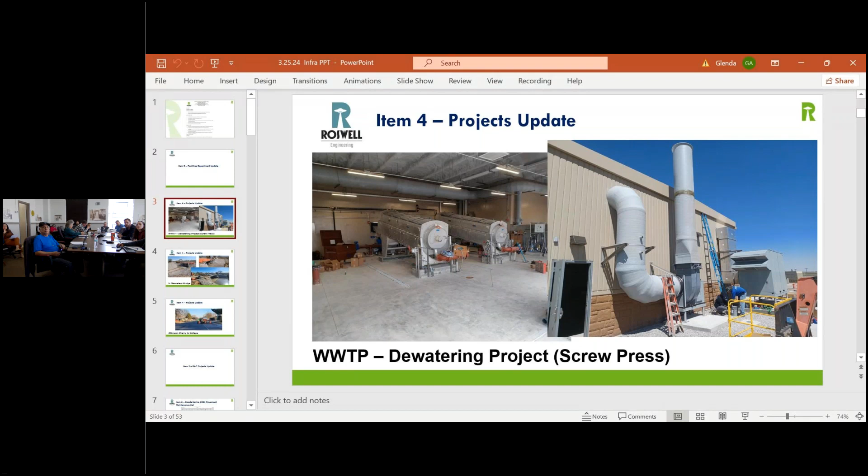Any specific projects that you want an update on? I think for a large part of it, a lot of it is self-explanatory. We have a few pictures from the dewatering project, and then the next slide is some pictures from the Mescalero Bridge project. But as the Chairman said, we'll stand for any questions on the engineering project update.

On the bridge, when is that going to be done? Thomas McAllister: We've got about 2 weeks of roadway before we complete the roadway and structure construction. But there's a lead time on the actual bridge railing, so right now we're trying to figure out how long that lead time is and if we can put anything in there temporary. We may be able to come in with some temporary wall barrier to protect it and open the road until we can get the guardrail installed. As far as the project construction roadway structure goes, we should be able to have it completed within the next 2 to 3 weeks.

And if it gets as big as that river can flow, do you have to have a guardrail? I don't know out here, I just know how big it was coming across Main Street. Yes, sir, due to MUTCD standards, we have to install guardrail to open it to traffic, or some kind of temporary railing system. Because if it gets as wild as it did on Main Street, it'd be better if it could fold over, because you don't want it to catch trees, it'll take out the whole structure. Right, this structure is considerably bigger than what was there, probably 5 times bigger.

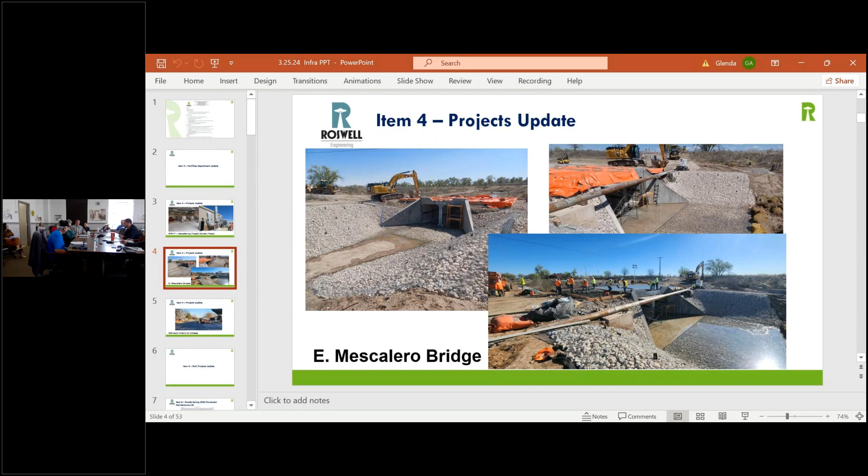I'll give you an update on some of our projects we've had on the list for some time. First is the apron replacement project, 1920 grant. We received a 1 year extension from the FAA, so it won't expire until August of 2025. That will be a fiscal year 25 project.

The next item is basically the same type of project on the ramp, but we won't be doing that until like 2027. So next fiscal year I'll ask them to extend that one year out, unless of course we have funds to complete it.

For the airport master plan, we received the second working paper. The TAC team received that on February 29th. I asked that they have all their comments back to me by last Saturday, and I received one comment back from those on the TAC team. So we'll proceed with working paper 2 unless we receive others, and we can take those comments into consideration.

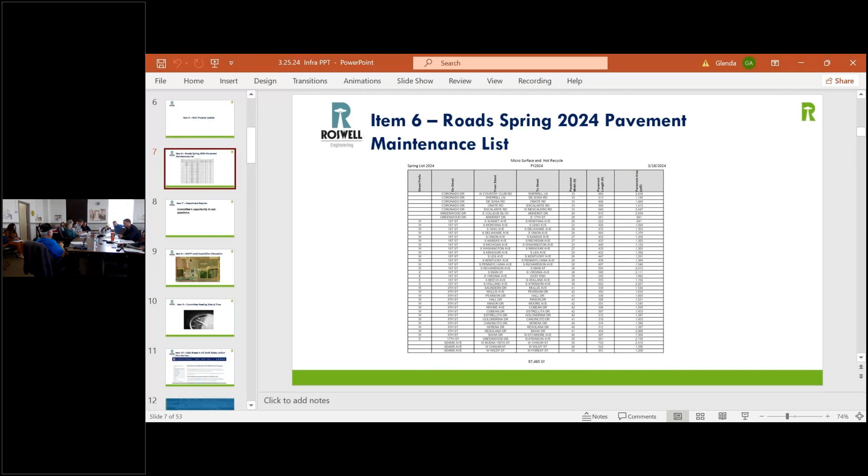Next item. Informational reports from departments associated with infrastructure committee, and understanding that we have additional departments coming on board because of general services. So it's not just the departments that used to report to infrastructure. Now we have like parks, I believe, and I don't know what other departments.

So my opinion is if department heads took the time to put a report together and they want to give a report, then we can hear the report. For the most part, I take the time to look at the reports before coming to the meeting, and if I have specific questions, I'll jot them down to ask instead of letting the department heads take time and go over their reports.

But that doesn't mean we will not hear your report if you do want to give it. Committee members, if you want to hear a specific report, you can request to hear that report. If not, we'll just ask the department heads if they would like to give their report, or just skip over it.

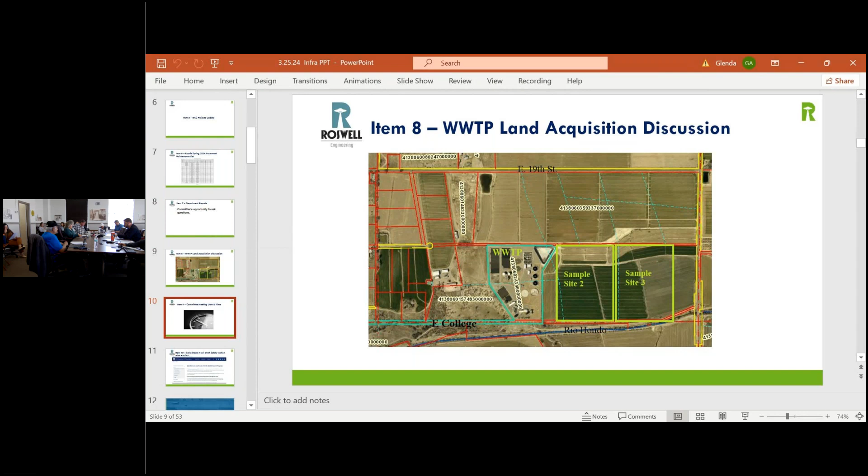The reason this one is in here is I requested for this particular item to be placed as an action item, and I had met with Councilor Korn.

During the discussion, we talked about a lot of the items from Infrastructure Committee being directed into finance or legal. Councilor Korn said he would like additional time if some items are coming to finance, to be able to get to know the item and be aware and research it.

So I told Councilor Korn that I would request for the meeting to be held on the third Monday of the month instead of the fourth, which would give Finance Committee an additional week in case we send a few items to Finance, so they can look at it and research it.

Committee members, do you have any comments? Any concerns of moving the meeting to the third Monday, which will be right after the city council meeting?

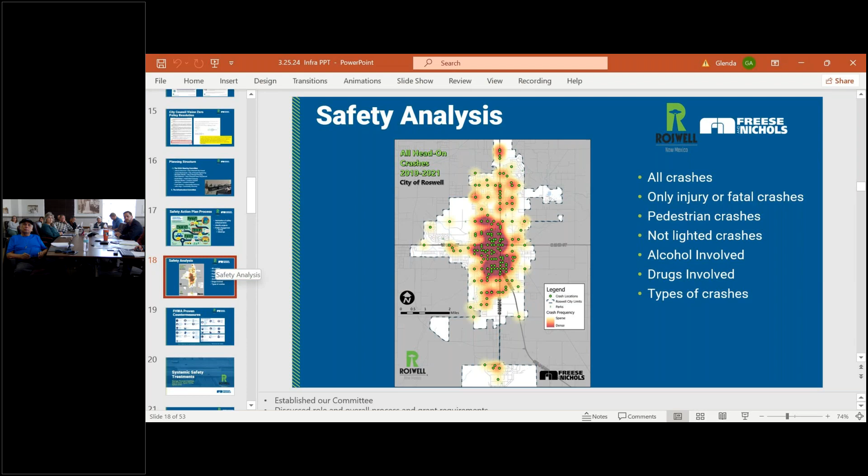Next - the Federal Highway Administration has a set of proven countermeasures where they've done years and years of analysis on what works where. And they've given us guidance to look at, I think there's 21 or so different proven safety measures where they've cataloged - if you do this, this will have a certain percent reduction in crashes based on your conditions. So if you've got a lot of

dark crashes, just putting a light out there at the intersection, improving the visibility, has a certain reduction factor. And so you can multiply the crashes by the volumes and come up with a reduction factor and figure, well, if I spend $5,000 on putting this light on, I'll get $20,000 worth of benefits. So you run those calculations and see where the low-hanging fruit is, what I can put in there for a certain amount of money. And it's a variety of things.

Look at the signals. We have backplates to prevent the sun, so you can see the light a little bit, but if you have a yellow reflective edge around it, that makes that head more visible. That has a certain percentage benefit. So all these small things that are not very costly can have great benefits.

And so we are looking at the program of those improvements as a system-wide improvement set, and then some very focused projects to look at doing things. So next slide, a little bit about our systemic safety.

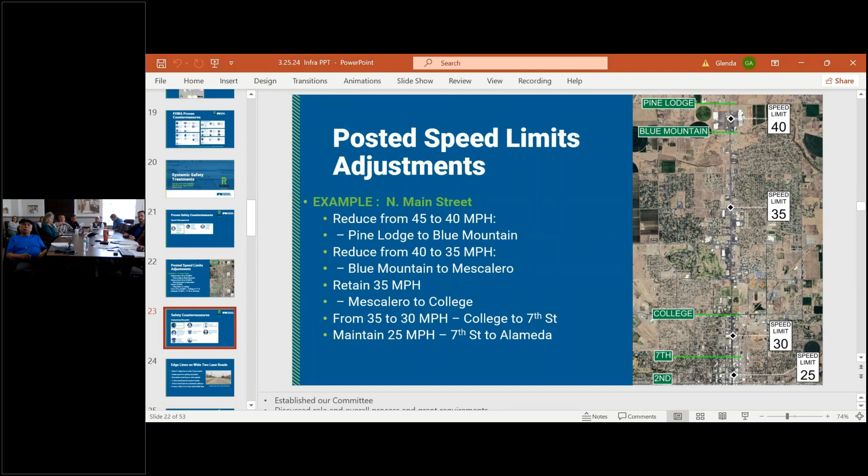Pedestrian and bike considerations for some of these cases. Bike lanes—we have a bike plan that suggests we do bike facilities on areas of the streets where we also have some wide two-lane streets. If you have a wide two-lane street, you have a lot more energy driving than if you put an edge line in there. Say I've got an 11-foot lane, leave 5 or 6 feet on the outside—all of a sudden I've got a constrained traffic calming device for the drivers, and I've got a de facto bike lane. The bike lanes can sometimes be used by parkers too, depending on what's needed in that area.

But if you've got something wider, you can put in a buffered bike lane. Think of some areas around schools that have a very wide area—we could have a buffered bike lane where kids might be riding their bikes to school, things like that.

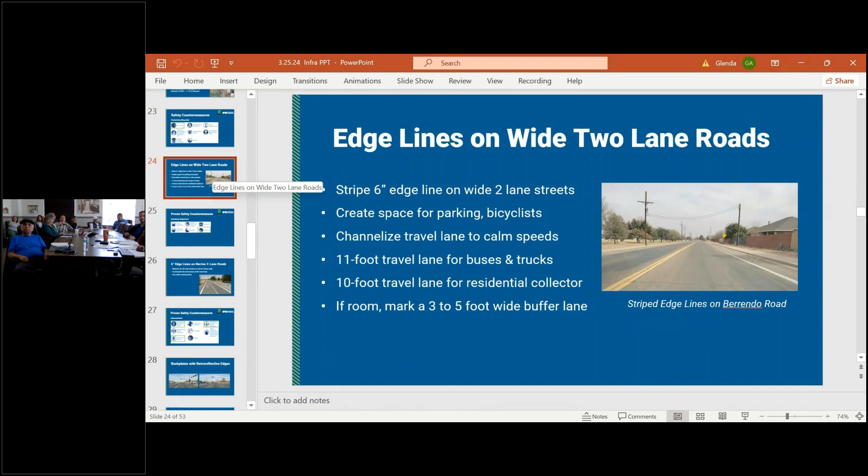Next is a little bit about our edge line striping. There are several treatments, but with edge line striping, sometimes instead of a 4-inch wide line we put in a 6-inch wide edge line to really strengthen that edge, especially if you're going to run off the road if you don't pay attention to that edge line.

So going in with that in a rural type setting has a calming effect, knowing where that edge is. I can see visibly that I have a narrow lane to work with, and it tends to keep that traffic from going quite so fast. And again, you denote the edge where you're going to lose control if you go down that point.

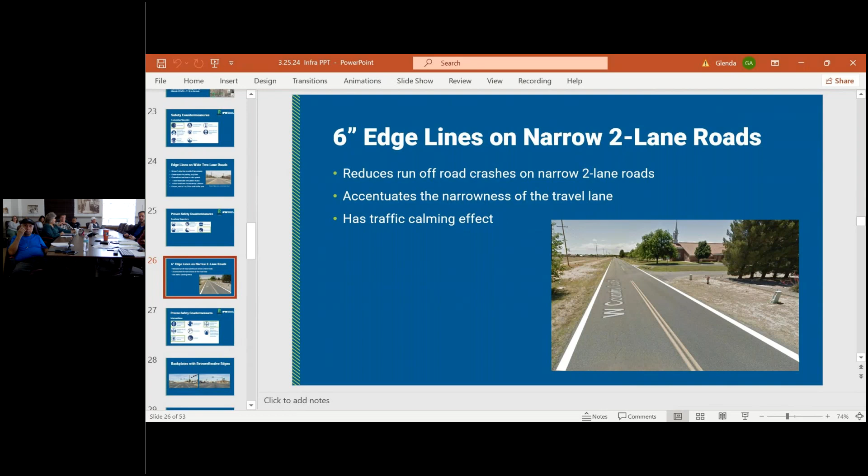We talked a little about yellow change and all red intervals. There's a certain area you don't want to go too long on those yellows or too long on red because people start expecting to have a long term and they blatantly don't stop at a yellow when they could have. So you don't want to make them too long. So there's a reasonable range that we comply with. And all of this stuff is in the manual on uniform traffic control devices of how to do it, how to comply, how to apply these things.

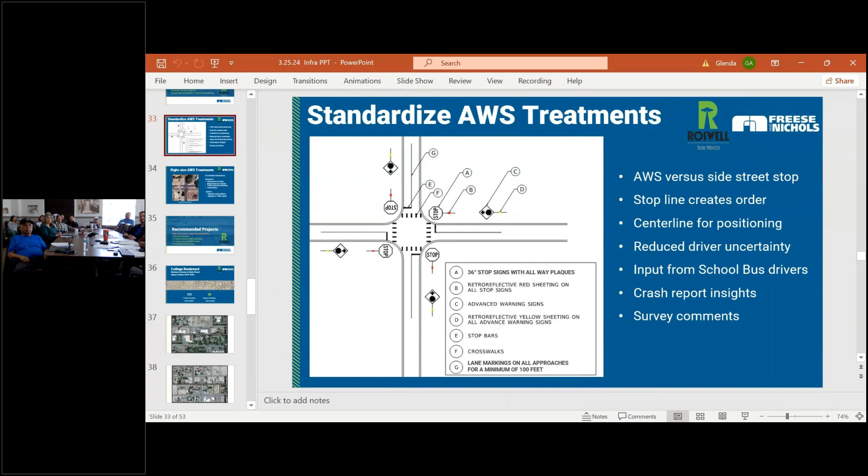And then, okay, so that's the standardization of all-way stops. Next slide. We'll try to go fast so we don't spend too long now, so you have plenty of time for questions.

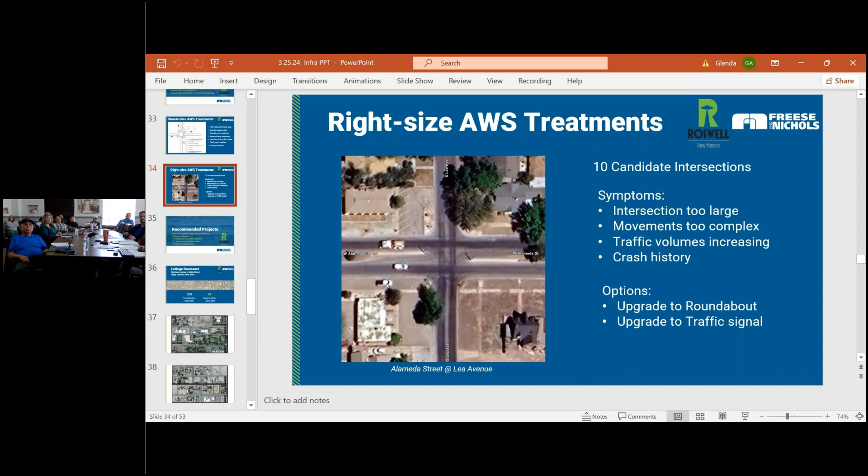Right size in the all-way stop treatments. We do have, this is Alameda, but big wide intersections, so it's hard to judge when you've stopped at your stop bar and this other guy's way over there. Who stops first and who's going to go, and one has a long distance to go through on that control, rather exposed going through large intersections. So maybe a candidate for a traffic signal, maybe an opportunity for a roundabout to kind of better control and manage that setting where everything comes into play.

Some very specific recommended projects. Now, even we're gonna plan to do all these systematic projects. They're all in play, and we're in our implementation project that we will propose to federal administration for the Safe Streets for All implementation grant. It would be all of those systematic elements. Upgrade the all-way stops, put in backplates, put in the signal sign, put in the edge line striping. That's kind of a baseline of those things.

But then we want to look at some very special projects that looked at those high injury network elements, high injury intersections. 3 special projects. We have College Boulevard from Main to Montana that just jumped off the page. There's a ton of crashes in a very short distance along this section. The next one was South Main at McGaffey Street, a very concentrated focal area of dozens of crashes all within a couple of block sections.

So I love the focal area. And then 3rd Street and Main Street is kind of a special case, but it works functionally with the issue of congestion at 2nd and Main, and it's queuing up 4th Street and all the stuff. So we have a concept for that. I'd like to walk you through those real quickly, and then we can open up for some questions at the end.

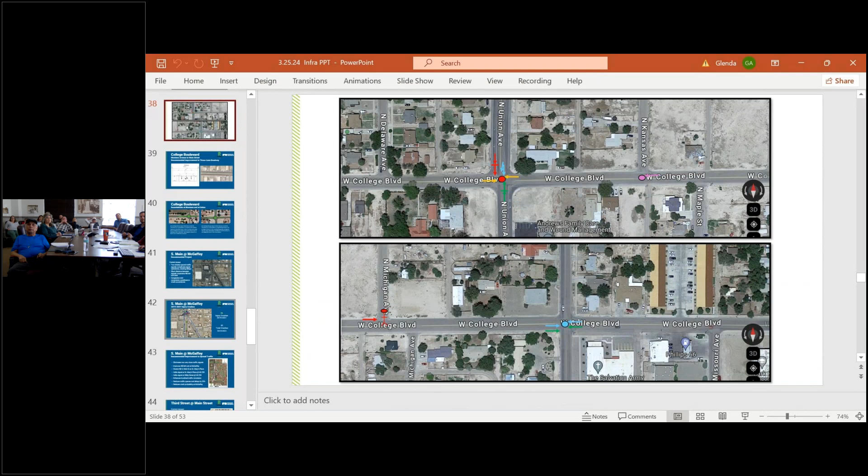Next one down, that's just a focus area. We have Union, around that's all-way stop concentration crashes. But even just throughout, there's just a host of small crashes on this core of driveways and things like that could benefit from having a center turn lane. They can make it a 3-lane that starts at Main, making that 3-lane consistent all the way through to where we connect down to the 4-lane that's over at Montana. So that's the concept for this project.

The next slide is it's going to get a standard 3-lane street with a center turn lane up and down. Then we have something we can do when we get to the intersections. We have dedicated lefts and things going on, some kind of storage area for people who want to turn left into driveways. And then we would supplement that with a 10-foot shared use path along one side that would bring the bike lanes on into this corridor, then a shared use path to get over to Main Street.

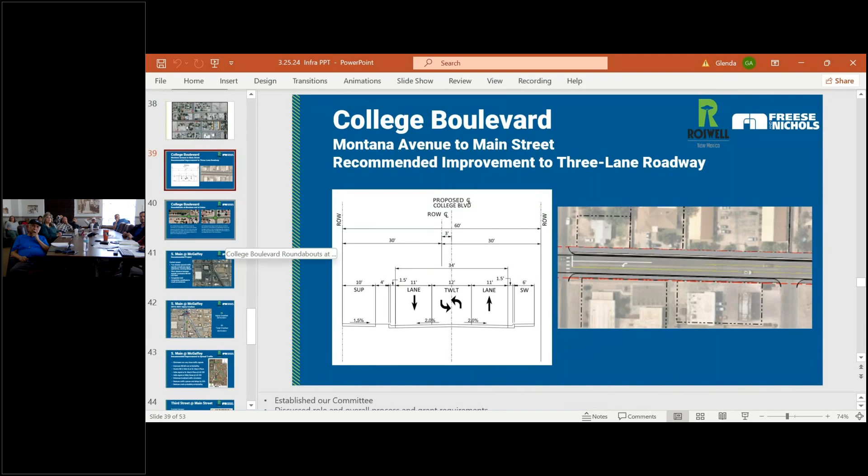And a couple of things about the intersections that we would go to. There's, down the next slide, a couple of concepts for when we get to Union. It's kind of big, those oversized intersections, got its own right turn lane, things like that. It's offset a little bit from the folks coming from the south. So a roundabout treatment is a candidate for managing the movements in that area.

If you're not familiar with the roundabout, they help deflect the energy at the intersection. Folks coming in the roundabout are usually channelized to go about 20 or 25 miles an hour through the intersection. A nice thing is that if there's nobody else there, you don't have to stop a lot, you just kind of work your way through the intersection and go. But if there's someone stopped, the person who is in the roundabout has control, everybody else coming in has to let them pass through, and you come on. It's all kind of a counterclockwise circulation. The angle of entry is very, very small instead of a right angle crash. So if you do have crashes, misjudgments in timing and gaps, the crashes are minor. So these reduce serious crashes by putting in roundabouts.

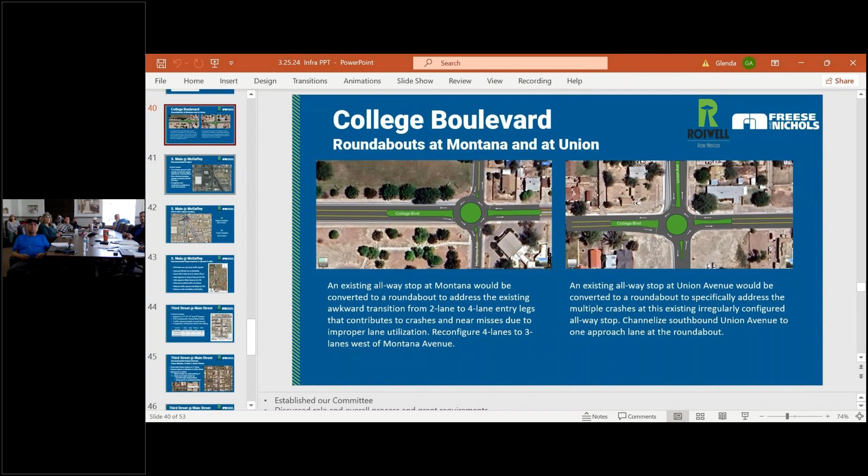Next slide down is Main and McGaffey. Main and McGaffey was kind of, I read through the master plan for a community, and that's one of the targets was, let's do something about Main and McGaffey. That's been in the books for a while. And so our steering committee folks said, let's do something about Main and McGaffey. So we spent a lot of time trying to figure out what can be done about Main and McGaffey and what's the problem with Main and McGaffey and why is it the problem?

We got too closely spaced signals that really make that cycle long. You have to wait for a long time to get through there, so people get kind of antsy about going, and then they try to get fast at the intersection because they don't want to wait again. So a lot of things going on at that. And plus, there's a very short distance. I don't know if you've ever come up 285 and hook the left on McGaffey, but that left turn pocket just kind of sneaks up on you, and it's hard to get in the right. So pulling those intersections further apart was part of the solution you're looking at.

And then what are some of the other movements going around? You got folks on Wilding and it covers the other streets east-west that have a hard time getting across these major north-south flows. And so come up with a solution that not only fixes McGaffey, but also serves the whole area collectively.

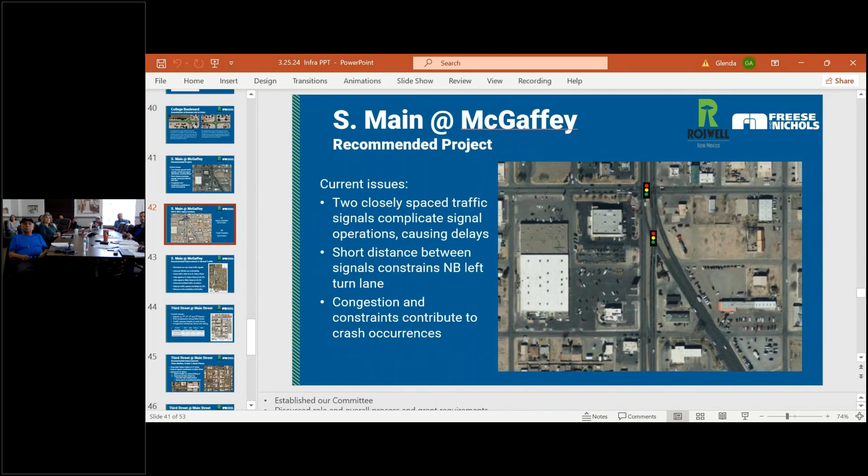Makes a lot of sense. And so our concept of this next slide is just, there's a bunch of crashes over there in Main and McGaffey. So it's kind of obnoxious, but that's the reality of what's going on out there. 26 injury crashes. That's a lot for just these two block intersections.

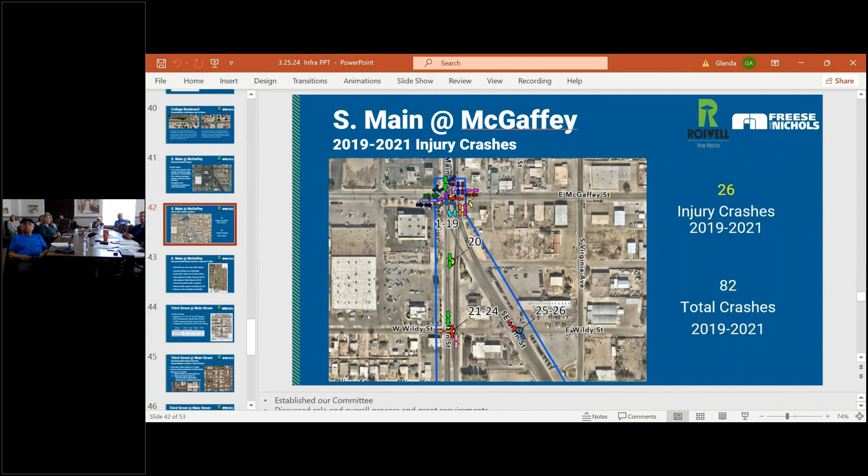Next slide down kind of shows you a little bit of what we came up with as the concept for working in this. I'm going to hit up here so I can point out a few things. Main and McGaffey stays this. Basically, if you're coming south on Main, you're going to split left and right just exactly as we do now.

But if you're going north on Main, you come up here and at St. Mary's Place, you turn right, go to signal, and you turn left, and then you are with the flow of that traffic that is coming north. And so we modeled all this traffic. DOT folks went out and counted cars for us and gave us all the input. And so we've actually modeled this, sent it back to the DOT, and we have a meeting with them on Friday to talk about this whole concept.

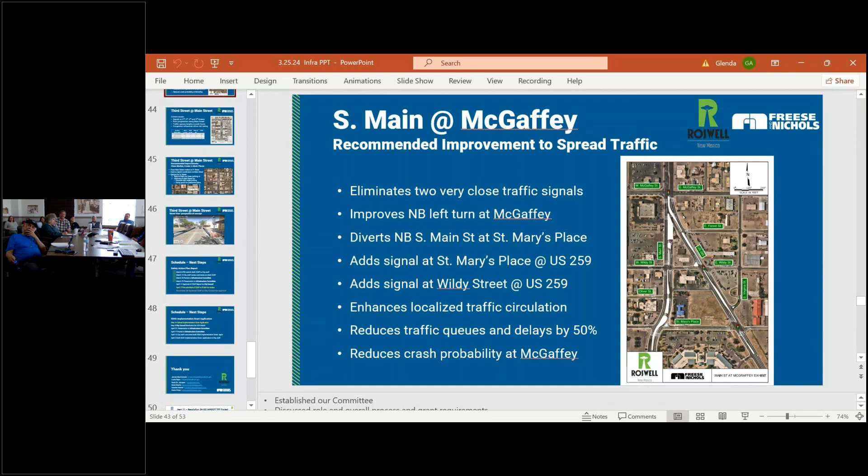Let's go to the next slide. The third of our concepts we wanted to share with you is 3rd Street and Main Street. Right now it's a very congested area, between 2nd and 4th. Push southbound in the afternoon is particularly troublesome as far as queuing and backing up.

Surprisingly, looking at the crashes at 3rd and Main, there's 18 crashes just in this one tiny little section. I didn't think there was much at all going on there, but a lot of it's due to the backing up and things that are kind of interfering in the middle there.

41 crashes, 13 injuries here at 2nd - not surprising, although it is high. One of the things we were talking with the folks at DOT about was getting rid of a signal, and they've been talking, I guess, to the downtown folks about getting rid of a signal in this area for a while. We could have better progression and better storage lengths and all sorts of things. So we looked into that a little and came up with a concept to address some of that, and we'd like to share that with you on the next slide.

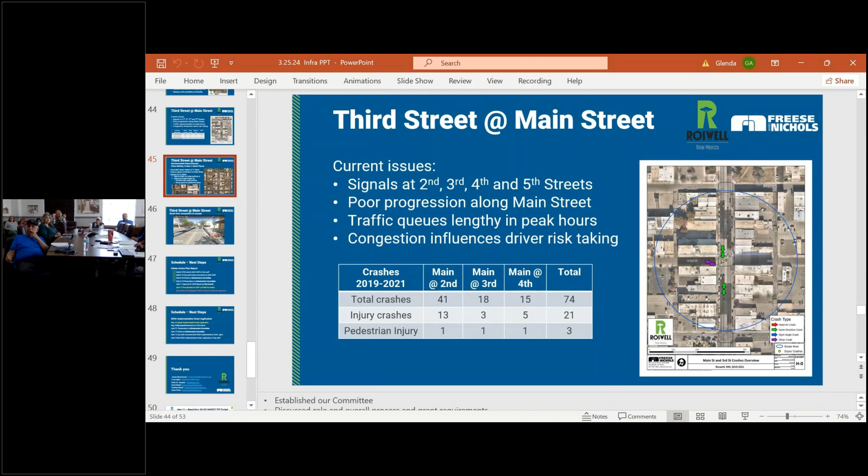The concept is essentially taking the turning capability, putting a raised median there, crossing over 3rd. That would let you have a little bit longer turning bays going south and north. It would let you have better progression between 2nd and 3rd Street because you wouldn't have traffic coming across and you wouldn't have to stop that traffic.

One of the things we looked at - once you did that, then what else could you do? You could have right-in, right-out circulation for the side streets on 3rd, or you could do something kind of unique: have a truncated part of 3rd that would leave just this half block for localized circulation, localized parking, but you wouldn't come across this pedestrian crossing at 3rd.

And then you could have kind of one-sided right-angle parking because the street's wide enough to turn in head-on parking instead of the two sides of curbside parking. So you'd actually have what would feel like better service to the business right along the side because they got head-in parking right at their business. And then you could have a little plaza area right at the end - kind of a no-car zone right up next to the pedestrian crossing of Main at 3rd.

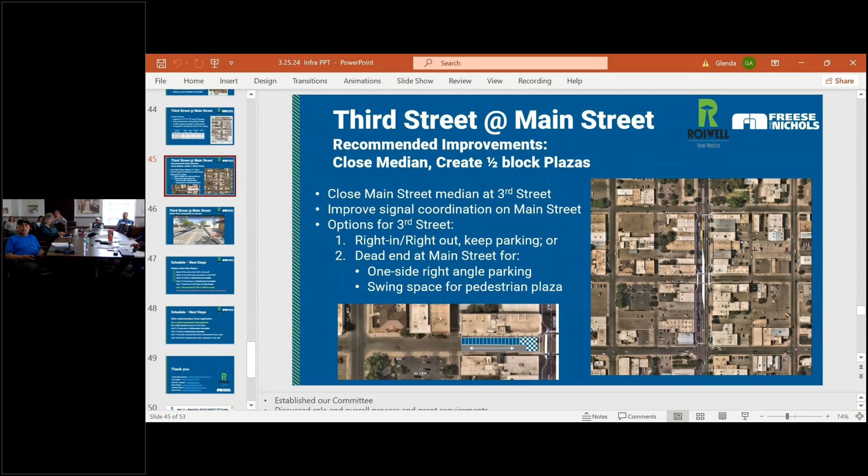Next slide. Okay, it's kind of a concept of what that would look like. The light would still stay there for stopping traffic at Third, but it would be green all the time until a pedestrian wanted to cross the street. Then the pedestrian would push the button, the light would turn red, they'd go across, but there would be no more indications on Third Street for cars to go in and out. So that would be part of it—relatively low cost, you're just putting in some raised medians in the middle, low protection at the end here, and then you've got yourself a plaza with some striping and other enhancements.

Well, and what you have, on some of that—the people moving is one thing, but one of the problems we have is all the streets and the alley, which is where a lot of people end up going down. And on the Richardson side, a lot of the buildings go right up to the sidewalk together, and there's very little place where you can look and see if anybody's coming. I guess if you cut off the whole street, you don't have to worry about that somewhat. But then they go down to Second Street, and Second Street, whenever there's a stop sign or a stoplight, it's bottled up and you can't turn out of the alley. And so there's... it just creates a lot more problems there somewhat.

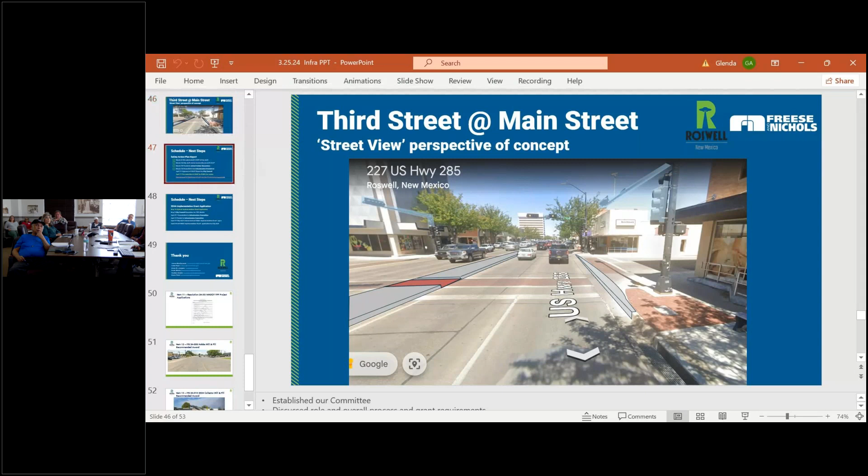We've been meeting with our advisory committee, presenting the packet and all these things to you about the safety action plan and its report. We'd like your feedback on the report to see if we can enhance it a bit, because we're going to bring that to the city council on the 11th, and we'd like your permission for the 17th pre-submittal of the safety action plan.

We're going to be working on the safety action plan all the way through the end of this year. But for this April 17th pre-submittal of our safety plans to the federal government, so they can say yes, you may now submit for an implementation grant, we'd like to have the official approved safety action plan coming out of the April 11th council meeting. So we're going to ask them to at least sign off that this is the safety action plan as far as it goes for now.

Then we're going to have version 2.0 to take a look at later in the year. We'll keep adding to and enhancing it, maybe come up with a longer list of potential treatments. But we want to focus on hitting the mark on their eight ingredients of an allowable safety action plan and make sure they give us a sign off, because on the next slide is the schedule for the implementation grant.

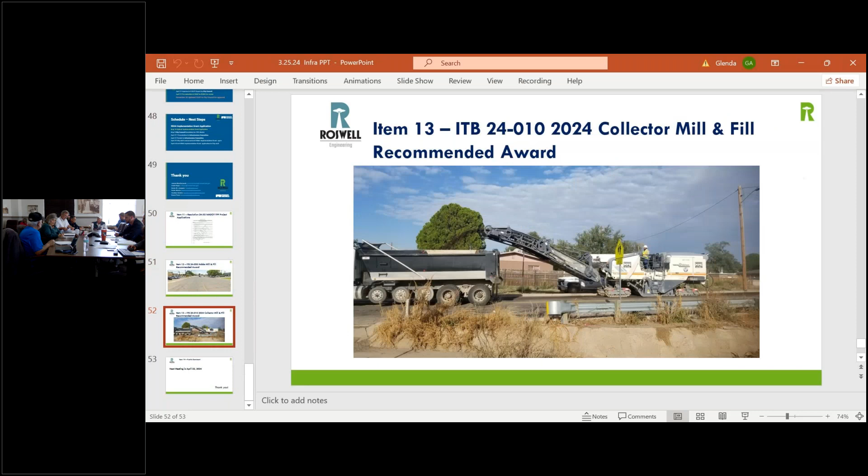Is there any discussion on any of the three items? No, not on my part. We already have a motion and a second, so any further discussion? If not, all those in favor signify by saying aye. Aye. All those opposed? Motion carried, and items 11, 12, and 13 will go to finance.

And now we come to public participation. Mr. Chairman, I motion that we adjourn. Public has already spoken. Motion denied.

I brought this up to the county, and the county did some research and brought back a bid. What they found was, if we compare bids, are we bidding the same amount for the lower bid and the higher bid? Or are we having change orders done to the lower bid that bring it higher? Like at your house, if you're taking down the roof, a lower bid doesn't include taking down the roof, then we get a change order to put in a roof, which makes the lower bid higher. Is somebody checking on that, finance, or whoever does the bids, to make sure the lower bid isn't coming with change orders for something the higher bid already included? Just thought I'd throw that out.